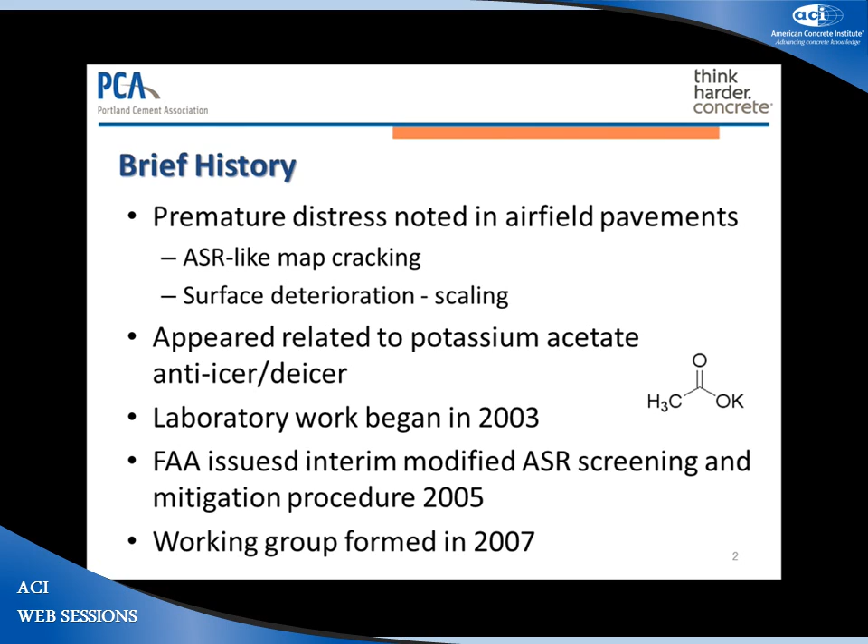Interim protocols to try to deal with this potential issue were issued by FAA in 2005, and a working group was formed shortly thereafter. This group was informally organized by PCA, and John Melander, my co-author here, was instrumental in putting this together. We worked in cooperation with the American Concrete Paving Association, Innovative Pavement Research Foundation, IPRF, and FAA and FHWA were involved as well. We wanted to establish consensus on the scope of effort involved in researching this problem, develop shared goals to identify what questions needed to be focused on.

It also provided an information sharing forum so that these independently funded research projects could come together while they were ongoing, rather than trying to wait and do these kinds of research reports sequentially. We thought by meeting while the projects were going on, interim results could be shared and some changes could be made to research programs to accommodate those. And the whole thing was geared towards getting the answer much more quickly.

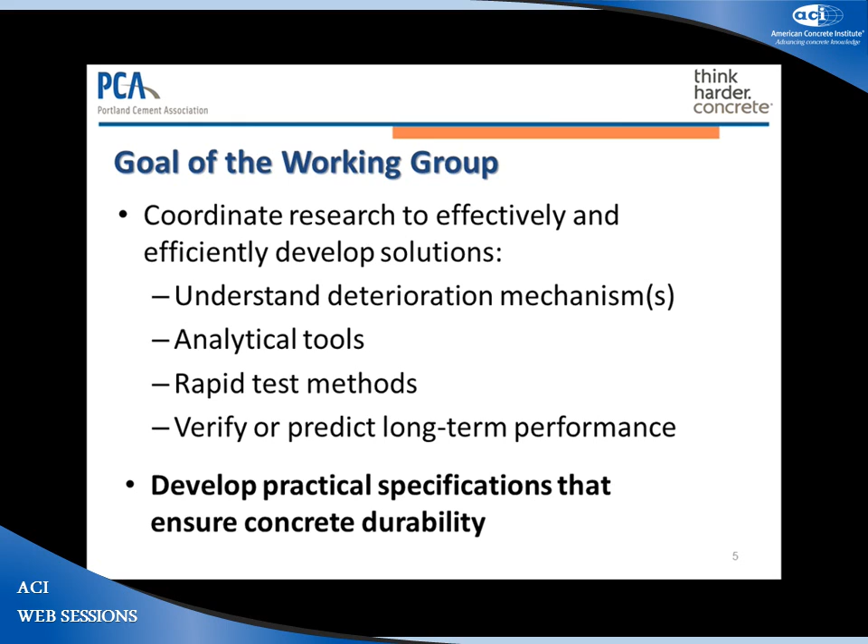So I hinted at this already. The goals of the working group were to coordinate the research effectively and efficiently to try to develop solutions to this potassium acetate issue. We wanted to understand what the deterioration mechanisms were, apply whatever analytical tools we could develop or could pre-existing tools. If we could develop rapid test methods that correlated with field performance, that was a key goal as well. And we also wanted to verify and predict long-term performance. And our overarching goal was really to develop practical specifications that would ensure concrete durability in the field.

I think Thano covered these early indications as well, but I'll just summarize them quickly. The early testing was based on modified C1260 and C1293 laboratory tests. Potassium acetate was demonstrated to accelerate ASR. Enough Class F fly ash or enough slag could be used to mitigate that issue, but Class C fly ash did not seem to help out. And then concrete, of course, with non-reactive aggregates could also be deteriorated.

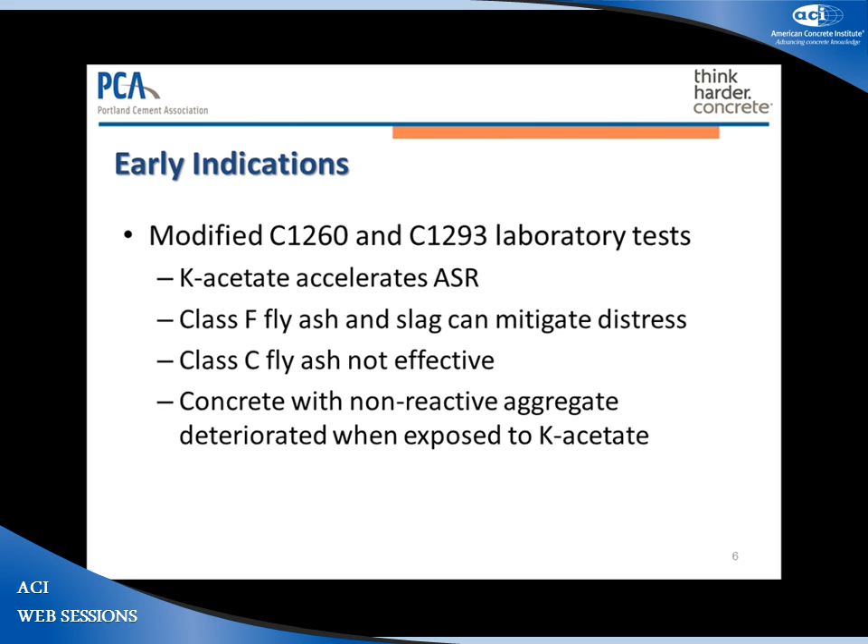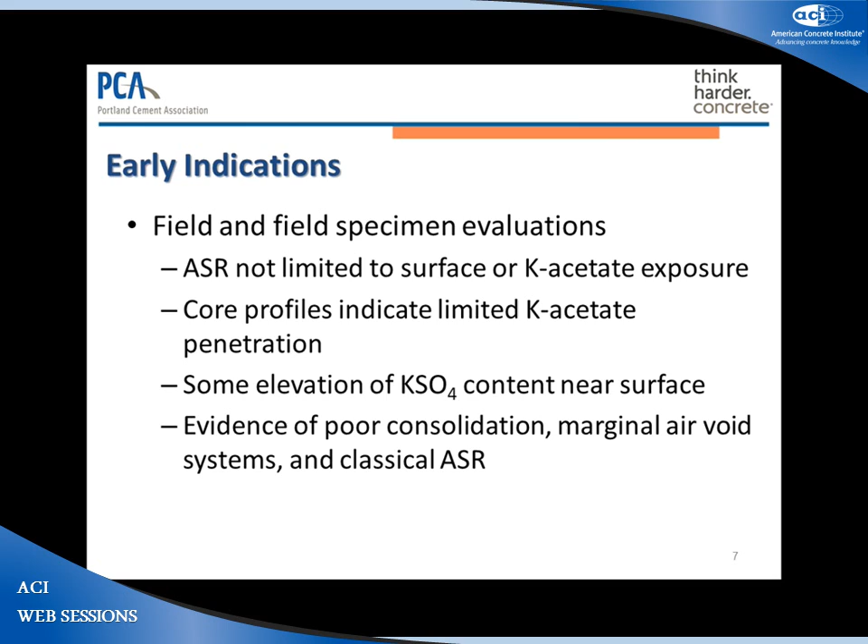Early field results indicated that ASR did not appear to be limited to the surface of the pavements that were involved or be limited to potassium acetate exposure. Core profiling did indicate that there was limited potassium acetate penetration into the concretes, and as Thano noted, there was some elevation of arcanite, potassium sulfate, near the surface of some of the pavements. And then there was evidence of other construction issues, other materials issues, poor consolidation, marginal air void systems, and then traditional ASR.

So several mechanisms were identified early on in the working group's meetings: what were the mechanisms for exacerbating ASR, what might be causing surface deterioration and paste alteration, what kind of deleterious interactions with SCMs might be going on, particularly with Class C fly ash, and then could potassium acetate simply be causing an exacerbation of freeze-thaw deterioration by some mechanism. And then we also noted, of course, that more than one of these mechanisms could be going on at the same time.

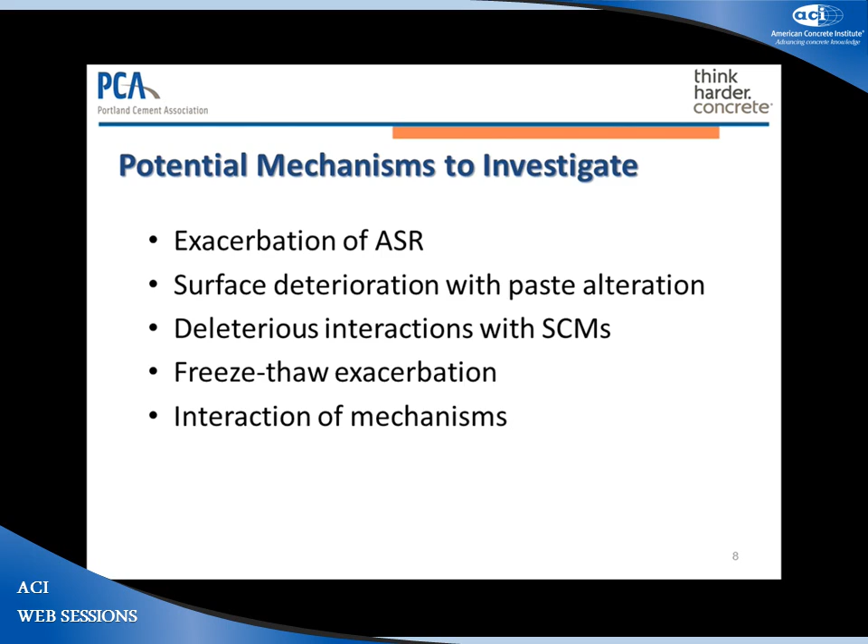So I've got 4 projects that I'll cover. I'll skip the one that Thano covered in the interest of time. But the first project was done at the University of Toronto, and I think actually Doug might have just left. But Doug Hooton and Sonia Ghajar-Khosravi were the investigators here. And the primary goal of this project was to look at the effects of potassium acetate on ASR resistance, freeze-thaw resistance, deicer salt scaling, and also they were looking at actual penetration profiles of potassium acetate into concretes. And all this was laboratory work.

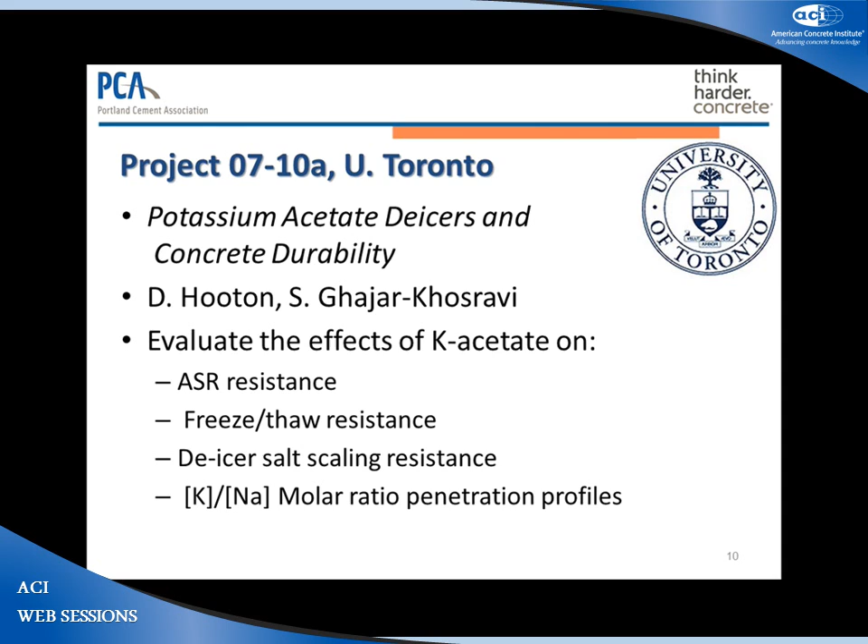They did a wide range of testing, the traditional ASR testing modified with potassium acetate as an exposure solution, freeze-thaw testing, salt scaling testing, and absorption testing, the C1585, X-ray diffraction, petrography. They used different solution concentrations of 3 molar and 6 molar potassium acetate, and then they used a variety of materials, 2 different cements, 3 different SCMs, and 4 different aggregates. So a very large matrix of research going on.

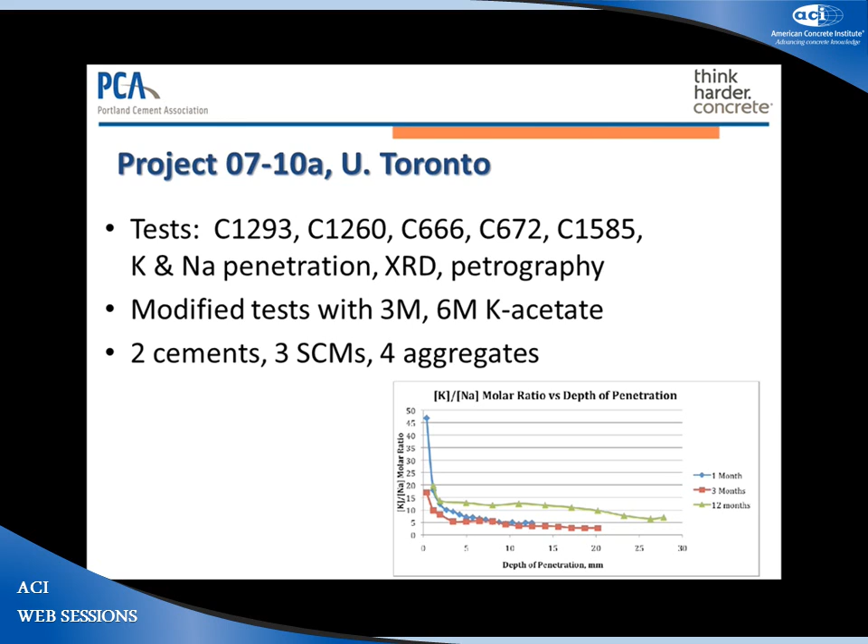And, again, out of a couple hundred-page master's thesis, just as an example, you can see that they looked at the potassium to sodium molar ratio as they profiled through a concrete specimen. In this case, a reactive aggregate was used, and over the course of a year, there was some potassium acetate infiltrating the concrete in the laboratory.

Now, some of the conclusions from this work were that potassium acetate can increase ASR-related expansion, but the supplementary cementing materials could mitigate that expansion. Potassium acetate did penetrate the laboratory specimens over time, and in the freeze-thaw testing and salt scaling testing, the air-entrained concretes performed very well. The non-air-entrained concretes were actually internally damaged, even though there was no surface damage, and it's likely because in these solutions there was no actual freezing at the surface. Even when the concrete got very cold, the surface didn't freeze, but the interior did.

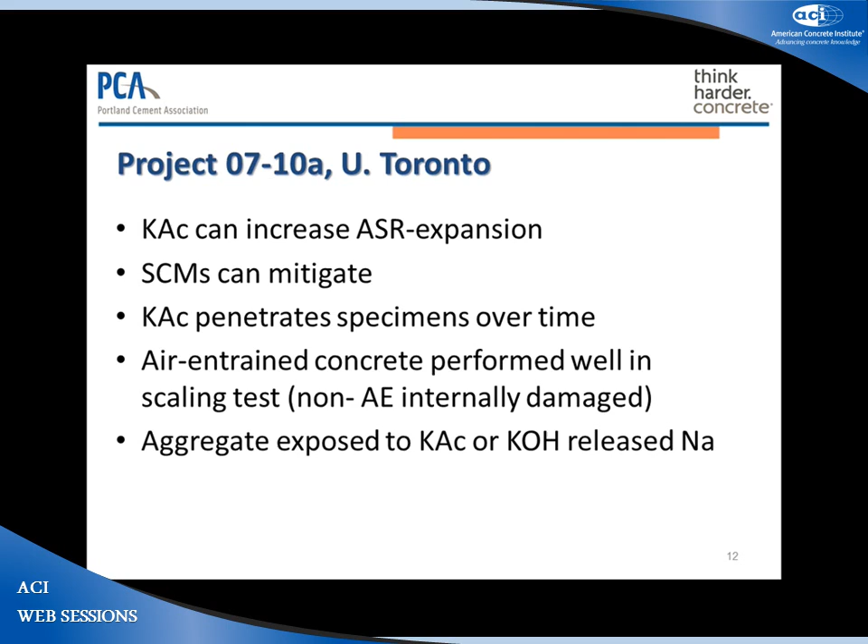And then they also did some testing on the aggregates themselves, and they found that some of the aggregates they used, when they exposed them to potassium acetate, they release sodium into the solution. So some indication that that might have an impact on the ASR resistance if sodium's being generated through some kind of reaction, and potassium is also adding alkalis. The ASR reaction could be more damaging.

Another project was done at Michigan Tech. Larry Sutter, Jerry Anzalone, and Carl Peterson were primary investigators, and they focused on laboratory work on, again, basic mechanisms, but looking at solubility and dissolution rates. And so they used some mortar bar testing, but a good portion of their work was done with a modified C289 test. That's the quick chemical test. It's sort of an ASR test on aggregate to determine how reactive it might be, and it's fallen out of favor, I think, because of a lot of false positives.

But in this case, they were using it to look at solubility of aggregates, and they used two different aggregates and a borosilicate glass as a model aggregate. And they were looking at the solubility of those aggregates when exposed to concentrated solutions of potassium acetate, as well as, you can see here, sodium hydroxide, potassium hydroxide, calcium hydroxide, all at various concentrations. So they're trying to get background information to feed into potential mechanisms.

And some of the conclusions they had were that expansion seems to be occurring in their mortar bar testing when the silica dissolution rate exceeds the diffusion rate of hydroxyl ions. So if silica is dissolving faster than hydroxyls can diffuse away from the reactive sites, you get reaction products forming. They fill in the pore space and they create expansion. If some of the products can move away from the reaction sites, then the hydration products either don't form, or they're not expansive.

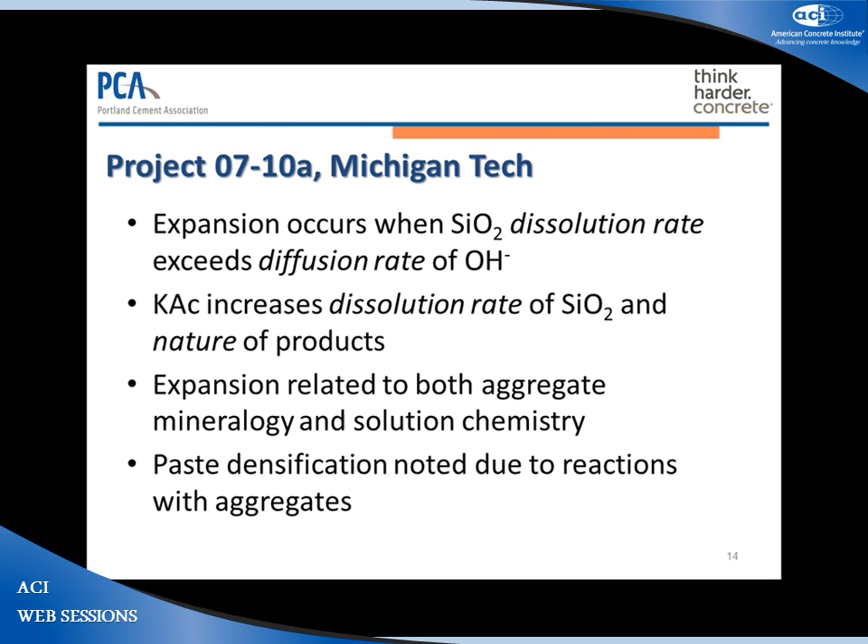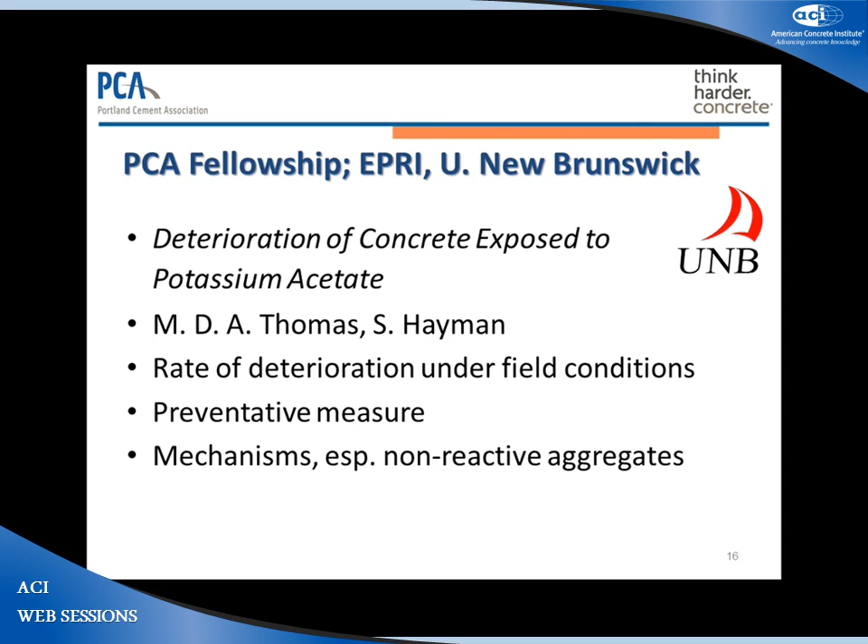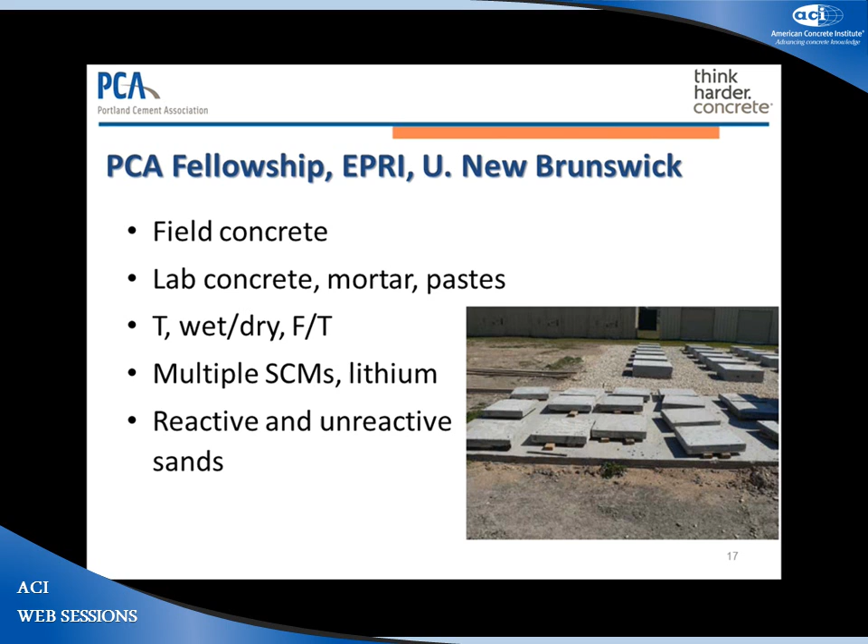Now, this was Mike Thomas and Sean Hayman's project. It was also later collaborated with the University of Texas, and Thano covered this in good detail, so I'll skip through here. But I think a primary contribution of this work to the working group exercise was that these were controlled field studies, and they were applying potassium acetate to known materials, known mix designs, and so that provided some useful data.

And then the IPRF project 05-7 was performed by Prasad Rangaraju and his students Chandra Balachandran and Dave Wingard, as well as Jan Olek at Purdue and a team of researchers there providing support to Prasad. This was a forensic investigation of airport pavements. So they cored 16 pavements at 8 different airports. I think all of them were exposed to potassium acetate, and most of them were suffering damage. There was a small set that weren't suffering any damage, even though they were exposed, and they wanted to see what was done right in those concretes.

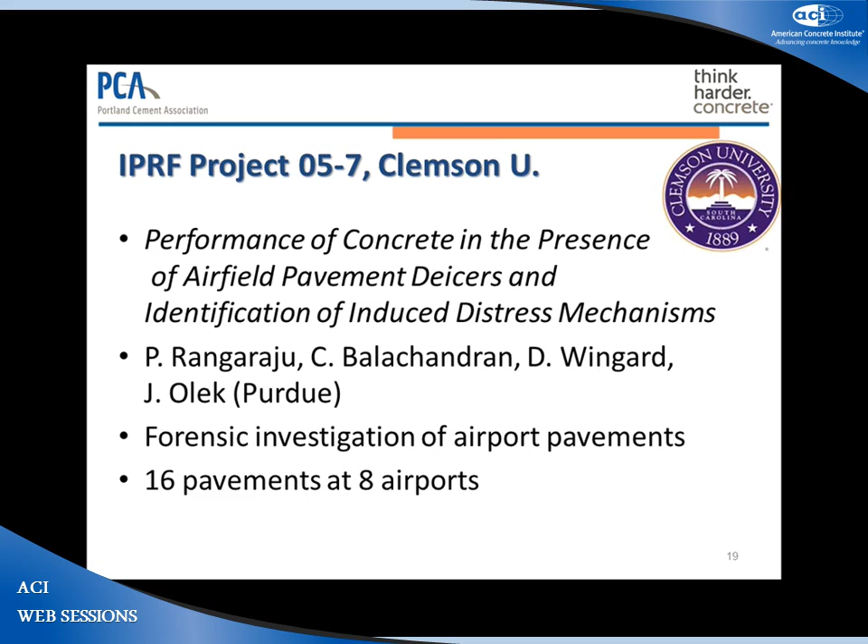So as a traditional forensic investigation, they looked at materials information they could collect from construction records and people's memories, as well as pavement service information, where they could figure out how much potassium acetate was applied over time, as well as what other deicers might have been used. They did petrographic and microstructural analysis. They did a significant amount of work looking at depth of penetration of potassium acetate, hardened air void analyses, pulse velocity measurements, and freeze-thaw testing in the laboratory of some of the cores exposed to potassium acetate after they're brought in from the field.

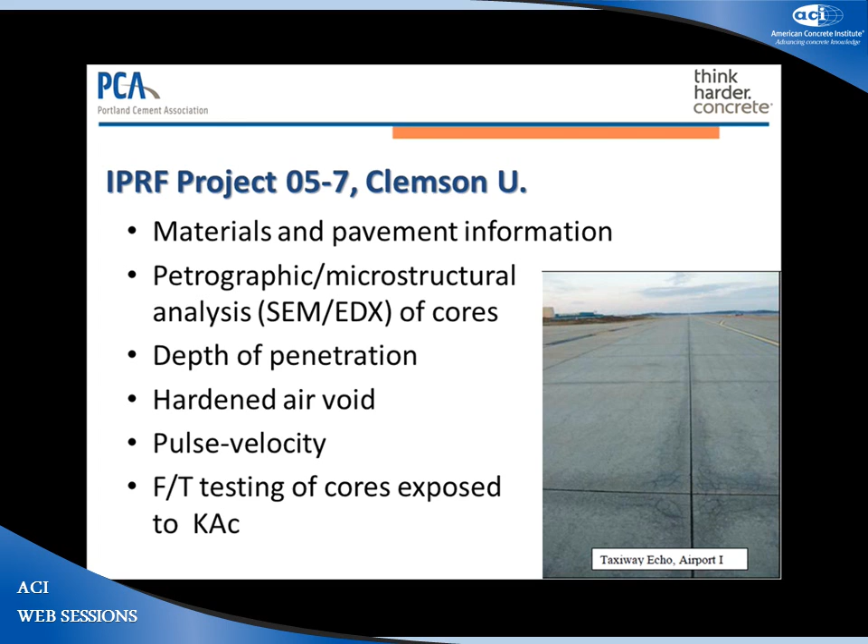The conclusions from this forensic investigation really sort of provided an answer to the perceived problem. In every case where they were coring pavements from distressed pavements, they found other issues that were responsible for the deterioration. Most significantly, they found ASR that was not sufficiently mitigated. So there was Class C fly ash used at low dosages, or there was Class F fly ash used at insufficient dosages, no SCMs used.

In other cases, other airports, there was some alkali carbonate reaction found. Drying shrinkage problems, freeze-thaw deterioration with marginal air void contents, poor consolidation. So there was no case where potassium acetate could really be pointed at as a field cause of the distress.

And I mentioned the penetration, and I think this was consistent with Thano. Most of these pavements were in the order of 15 to 20 years old, and the deepest penetration of potassium acetate in the field was about 15 millimeters.

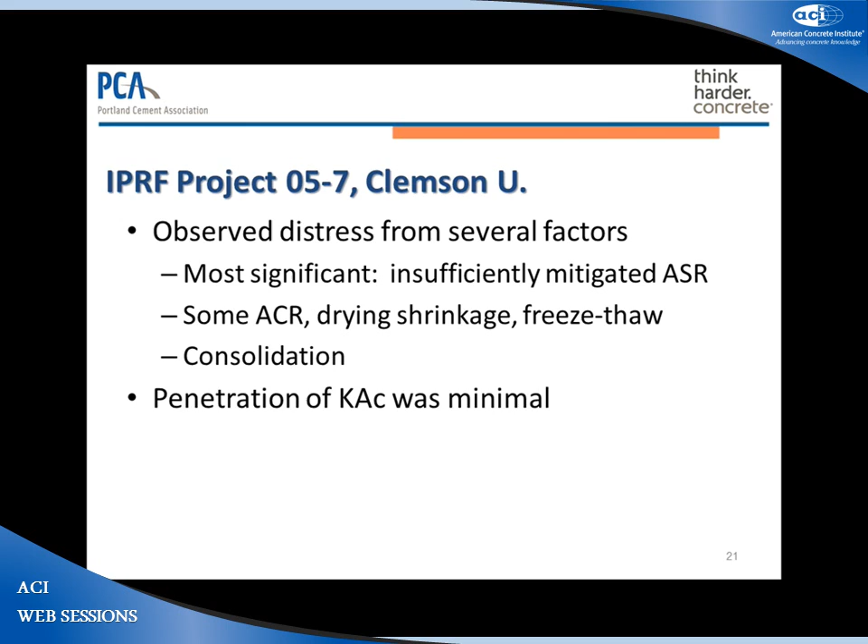So the common conclusions of the working group, they met after several years of ongoing research, and in the laboratory there was general agreement that potassium acetate can cause or accelerate deterioration, either due to ASR or even without susceptible aggregates being involved. And it was noted that the accelerated testing uses high concentrations, they use elevated temperatures to accelerate the effects, and they have a high continuous supply of alkalis, and that may be the reason that they don't necessarily relate to field performance.

And then that was the other conclusion, was these lab tests don't appear to be correlating with field behavior. In the field, potassium acetate is widely used as a deicer, but has not been shown to cause observed distress. The penetration of potassium acetate into those concretes was very limited, even over a 15 to 20 year time frame.

But it was noted that since we only have 15 to 20 years worth of data, we need to continue to monitor these pavements in the field because the laboratory testing does indicate a potential for long-term deterioration. So that was a recommendation.

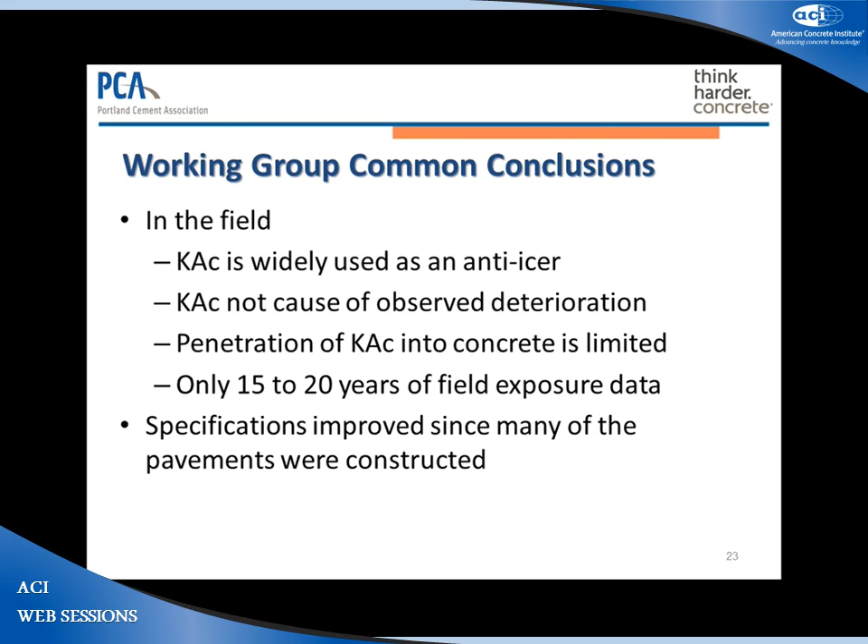It's also noted that specifications have been improved since many of these pavements were in place. I'll just say that there's more stringent and more accurate test methods that are involved now than there were 20 years ago, and better understanding of what appropriate mitigation protocols are needed. And so it's anticipated that ongoing future pavement construction for airports will not necessarily have some of the deterioration from some of the causes that were noted in the forensic investigation.

And then I'll sort of end here with a plug for the working group concept. In this case, potassium acetate was not really a field problem that we thought it was at the beginning of some of these research projects. But by working together to share interim results in a frank and open discussion forum, and note where some preliminary results weren't what we were expecting, or that some lab problems occurred that needed to be replicated.

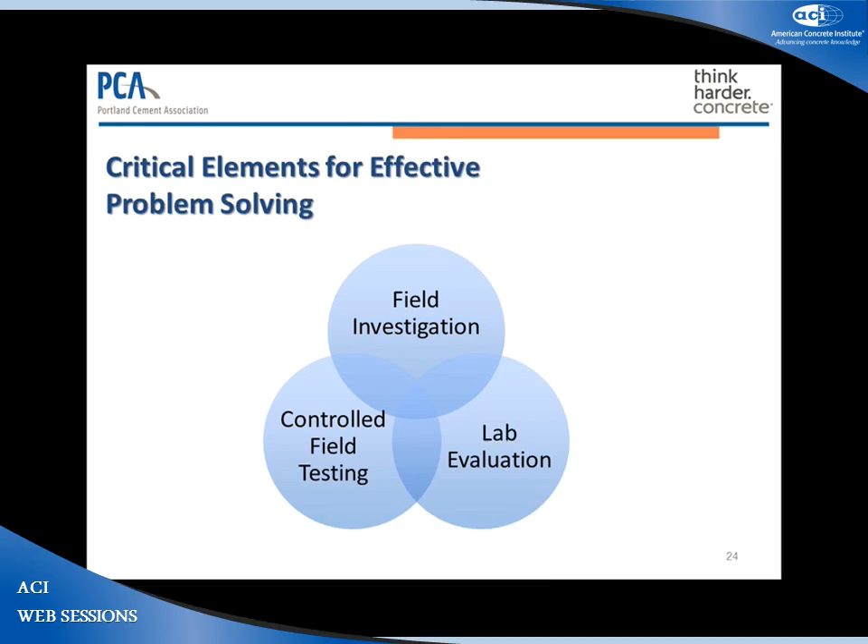And by looking at field investigations, controlled field testing, and laboratory evaluations all simultaneously, rather than possibly separately or sequentially, I think we did essentially answer the questions quicker than we might have otherwise done. And so I'd probably just put in a plug for that kind of concept in the future. Different funding agencies and different research teams working together to try to get to technical solutions faster. And that's basically it, I think.